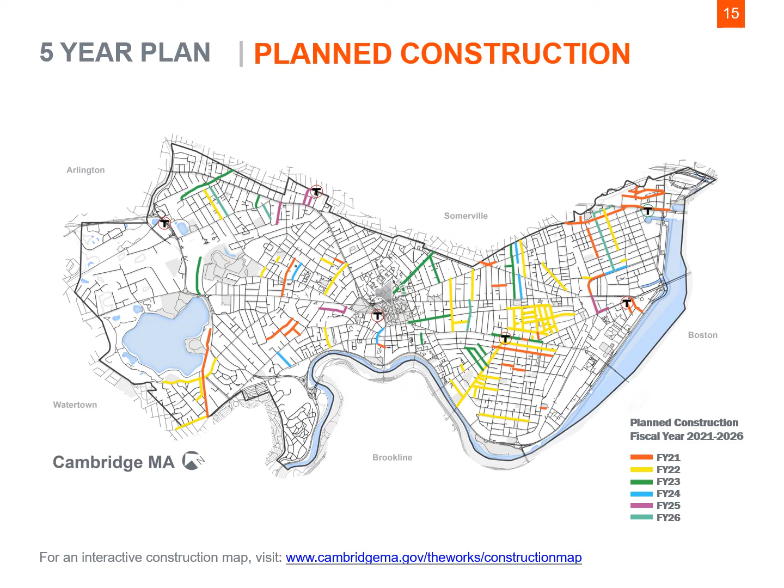There are many guiding plans and policies that help steer our work. First, the Americans with Disabilities Act. The Americans with Disabilities Act, or ADA, was signed into law on July 26, 1990 by President George H.W. Bush. The ADA is one of America's most comprehensive pieces of civil rights legislation that prohibits discrimination and guarantees that people with disabilities have the same opportunities as everyone else to participate in mainstream life.

Next, the pedestrian, bicycle, and transit plans. These plans emphasize improving comfort, safety, and operation for sustainable modes of transportation. Their goal is to provide a transportation system that is sustainable and efficient and moves people safely. Next, the Cambridge Climate Plan and recently completed Urban Forest Master Plan document our commitment to maintaining a healthy environment in the face of a changing climate.

So how do all of these plans and policies translate to specific street and sidewalk design? Let's go through some of them, starting with accessibility. Both federal and state regulations cover the construction of sidewalks and require newly constructed sidewalks to be accessible. The goal of the city's bicycle plan is to enable people of all ages and abilities to bicycle safely and comfortably throughout the city. The designs are developed as part of specific street design projects, like the one we're doing right now.

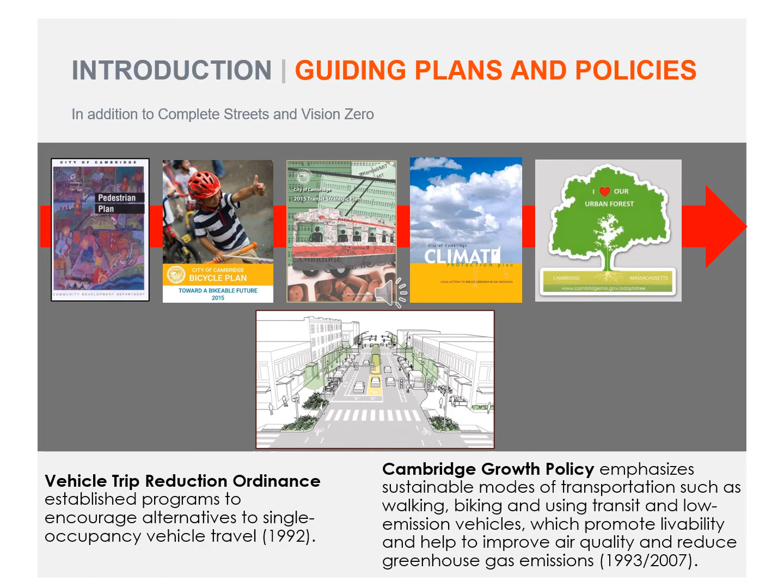The city does not control the MBTA system, but we can make improvements during our projects to improve accessibility of bus stops and improve access to the bus system. Street trees are an important element of our projects. We need to ensure that any proposed street tree does not compromise the accessibility of the sidewalk. MassDOT Complete Streets Program. A complete street is one that provides safe and accessible options for all travel modes, walking, biking, transit, and vehicles, for people of all ages and abilities.

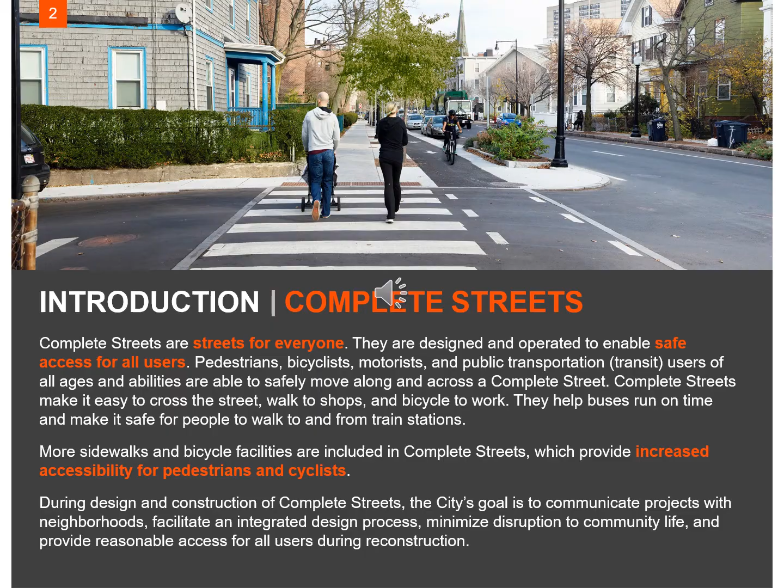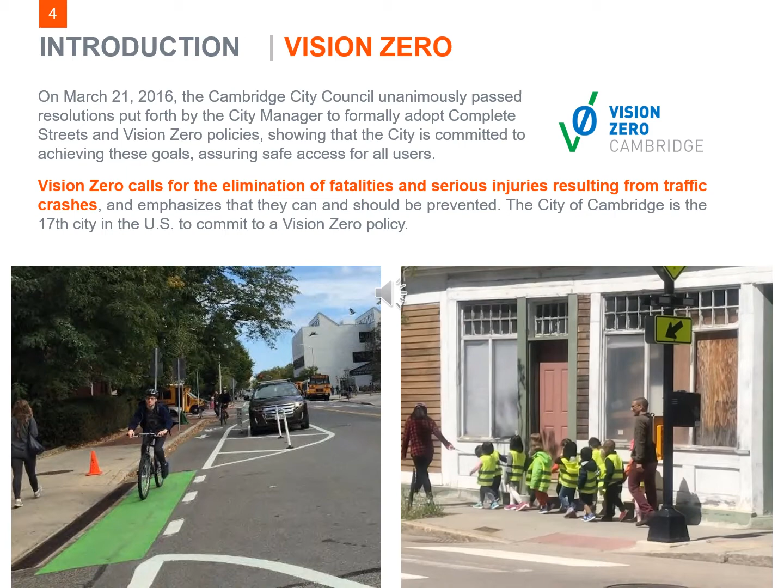At tight intersection corners where it's difficult to fit in a typical pedestrian ramp, we can construct a modified raised crosswalk. This has the advantage of eliminating the need for pedestrians to ramp up and down and also has the benefit of slowing vehicles as they turn in and out of residential streets.

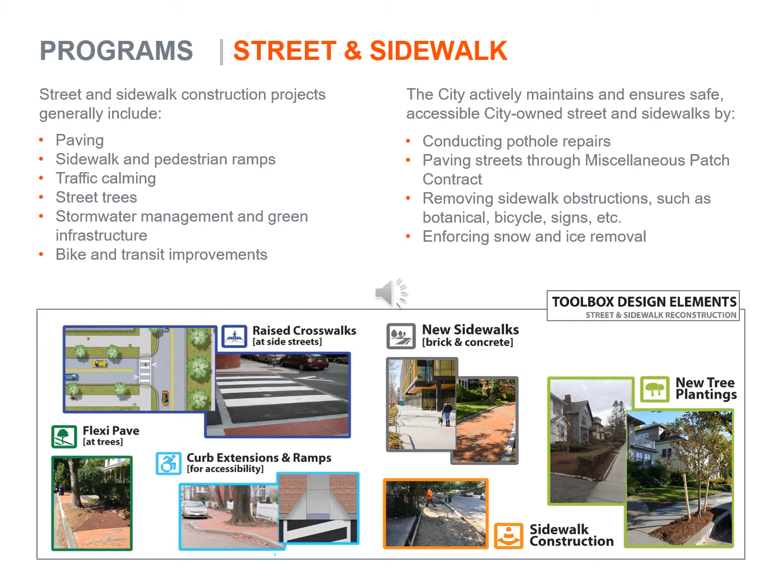Green infrastructure, or GI, is part of our effort to improve the quality of stormwater before it is discharged from the local drain pipes to the Charles River or Alewife Brook. GI refers to a variety of techniques which use a natural process such as selecting plants and soils to promote infiltration of stormwater into the ground, or to remove pollutants such as phosphorus from stormwater. The city has successfully implemented GI in a variety of roadway projects, ranging from major corridors to residential side streets. We are committed to incorporating these types of environmental improvements into smaller projects as conditions and space allow.

Our policy is to replace sidewalks in kind with the same material, although we do contact our property owners to see if they would like a change. We also give special consideration to materials when a project is in a historic district, or if it's in a larger project, one of the city's main corridors, or where a more uniform approach to materials may be advisable.

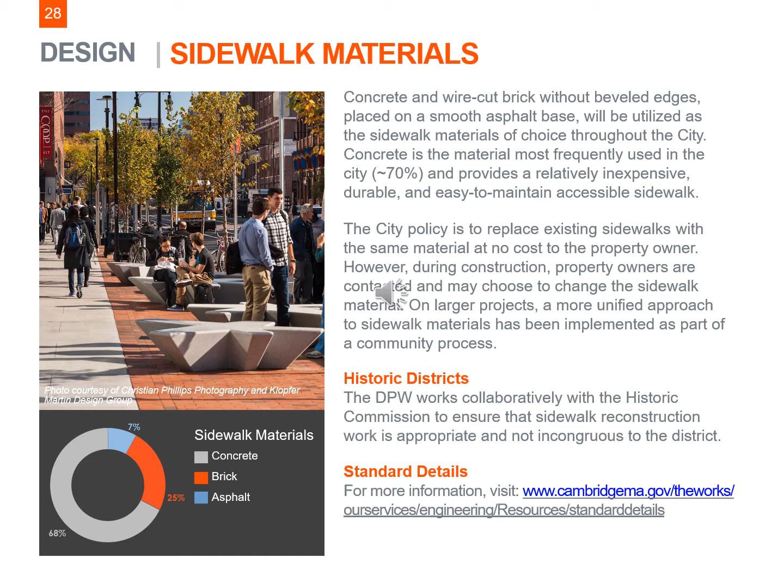Green infrastructure, or GI, is a part of our effort to improve the quality of stormwater before it's discharged from the local drain pipes to the Alewife Brook or Charles River. GI refers to a variety of techniques which use a natural process, such as specifically selected plants and soils, to promote infiltration of stormwater into the ground, or to remove pollutants such as phosphorus from stormwater.

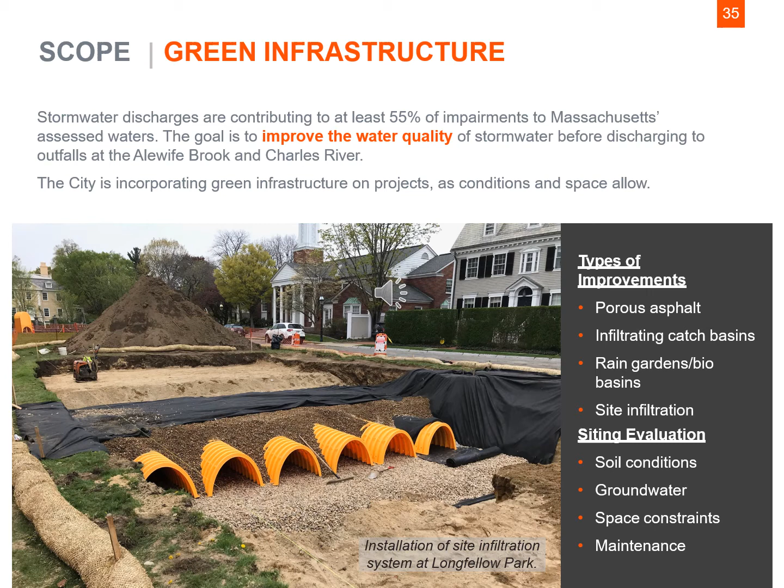The city has successfully implemented GI on a variety of roadway projects, ranging from major corridors to residential side streets. We are committed to incorporating these types of environmental improvements into smaller projects as conditions and space allow.

Bicycle facilities. The goal is to enable people of all ages and abilities to bicycle safely and comfortably throughout the city. The plan provides a framework for developing a connected network of complete streets, but does not provide specific designs for individual streets. The designs are developed as part of a specific street design project.

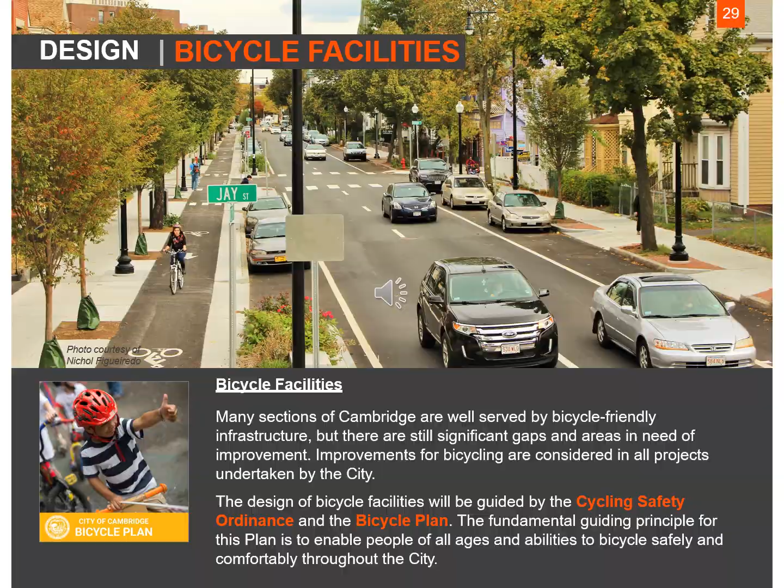Transit. The city does not control the MBTA system, but we can make improvements in our projects to improve accessibility of bus stops and improve access to the bus system. We want to emphasize that we are committed to improving transit access and accessibility of transit.

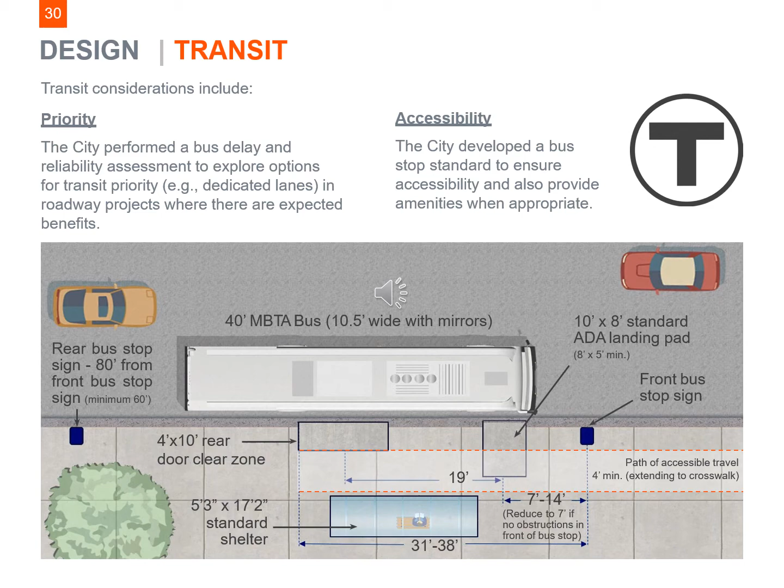Street trees are an important element of our projects. We place a great emphasis on protecting existing trees during construction, and we look for opportunities to plant new trees where possible. On narrow streets like the ones in this project, finding additional tree locations can be challenging. We need to ensure that any trees do not compromise the accessibility of the sidewalk and do not interfere with overhead wires. The city arborist will review the streets for this project and identify possible locations.

The arborist will work with the residents who may be interested in our back of sidewalk tree planting program. In this program, the city offers to plant trees at no cost on private properties where conditions are often better for tree survival. No matter where trees are planted, they are planted according to our updated specifications, which include a much greater volume of planting soil per tree, including beneath adjacent sidewalks. New trees are also watered regularly for the first 2 years by the contractor.

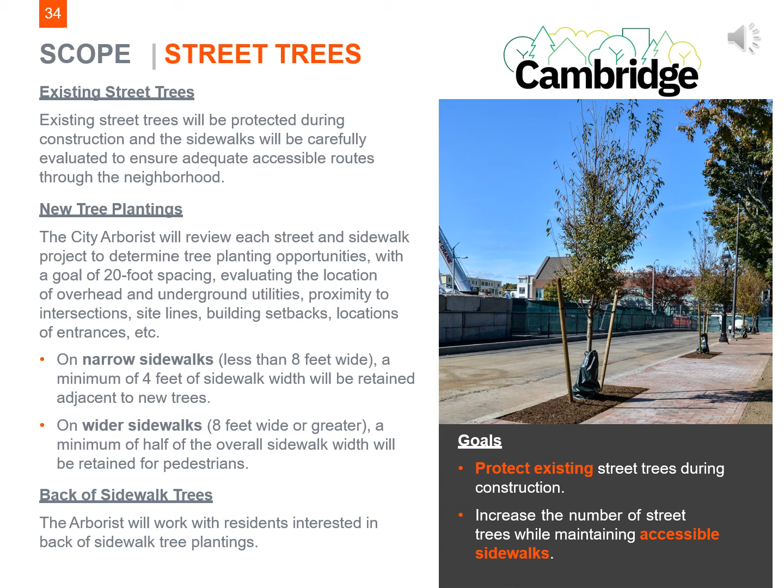Construction is understandably what residents and businesses are typically most concerned about. Construction is disruptive. It's loud, sometimes messy, and frustrating, but the city is committed to working with residents and businesses throughout the construction process. Each project is assigned a project manager and a community relations manager. That team works together to ensure that there is clear communication about what to expect and when.

Projects in the city have standard working hours of Monday through Friday, 7 a.m. to 4 p.m. We expect our contractors to implement and maintain safe and effective traffic management plans to assist pedestrians, cyclists, and vehicles throughout the project area.

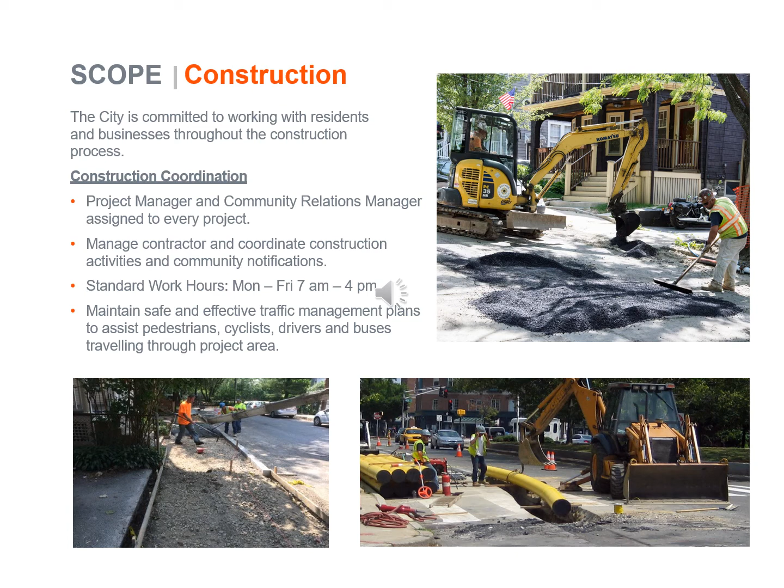This project is in the early planning stages, therefore a detailed schedule has not been developed. The next step is to hold a second community meeting once conceptual design plans have been established. At that meeting, residents will once again be asked to provide feedback. The city values feedback from those who experience the street on a daily basis.

After viewing this presentation, please send all comments and questions ahead of the October 20th virtual meeting to Kate Riley at kriley@cambridgema.gov. There will also be a time for comments at or after the October 20th meeting.